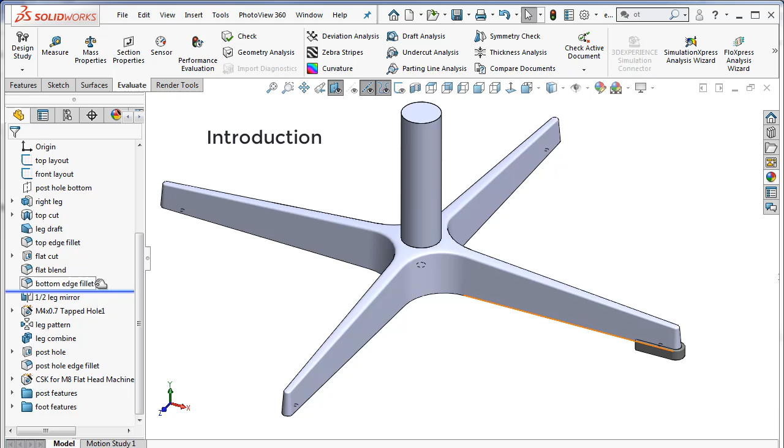Rolling back to just a single leg, the actual chair leg is crowned on the top all the way from the tip of the leg to the center where the post is located. And then there's a sharp edge radius running along the perimeter of the upper edge.

In order to do this properly, you actually have to build this entire surface as a fill surface and then add a fillet at the end. Making that fill surface requires making a lot of temporary surfaces and is very tedious. I've come up with a way to do all this that looks fairly convincing and saves about 10 steps.

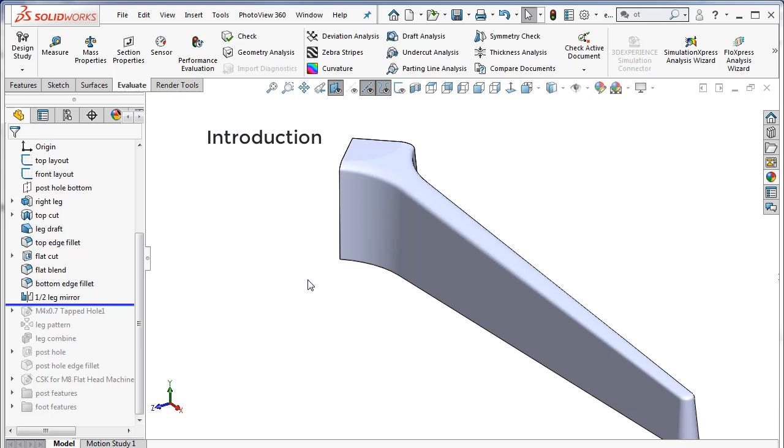The creation of the cross-shaped leg structure itself only takes about 7 steps, and the rest of the steps are adding the foot that go on the end of the legs and the post.

I'm now going to roll this all the way back to the beginning of the feature tree so we can see what our layout sketches look like. On the top view,

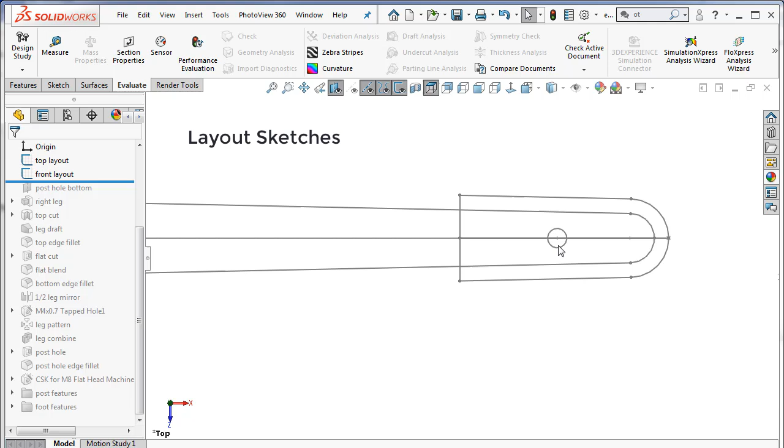we see that each leg is tapered as it goes from the center of the structure out to the ends. And I've also drawn in the top view of the little foot that goes on to the leg, the location of a screw hole that holds the foot onto the leg, for the screw that holds it on rather.

And I've represented just one adjacent leg. In this case, I've fully drawn out the right hand leg and just one line of the forward leg so that I could draw in the radius that blends the two together.

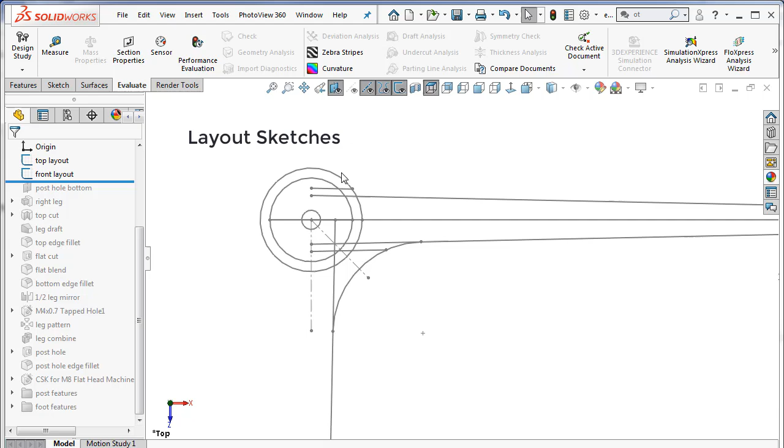I've also drawn this outer circle, which represents a flat area that's just a little bit bigger than the diameter of the post, and then the diameter of the post itself. This line here is a mirror image of this 45-degree construction line.

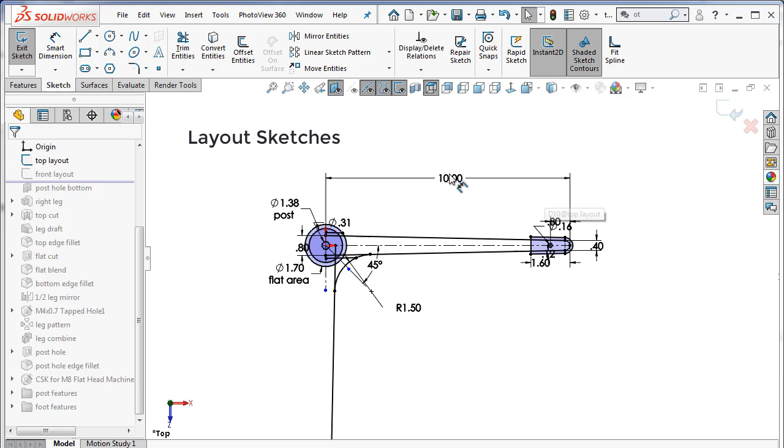As usual with my videos, I've just guessed on a lot of these dimensions, so don't use these dimensions, use whatever you measured on your own chair. I'll zoom in on this a little closer so you can see this all at once, and then move on.

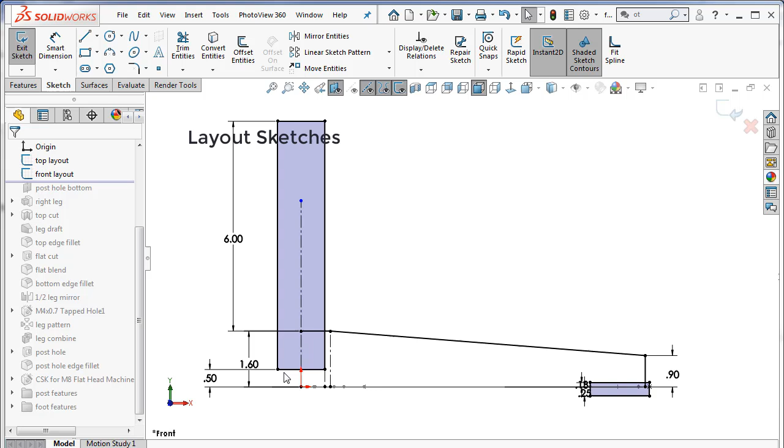The front layout illustrates the leg showing how it tapers downward from the center out to the ends, the front view of one of the feet, and the post itself, which goes partially down into the crossing leg structure. I've also included a plane that's going to be right at the bottom of the post, because what we're going to be doing is having a hole in the crossing structure and then inserting the post into it.

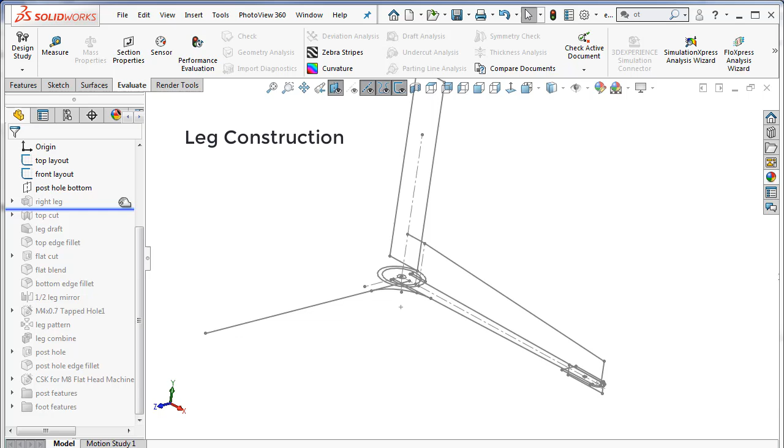So starting with our first actual solid feature, all I'm doing is copying this line here from the top view, the 45-degree line, and then the outer perimeter of one leg, and trimming it all together to get this final result.

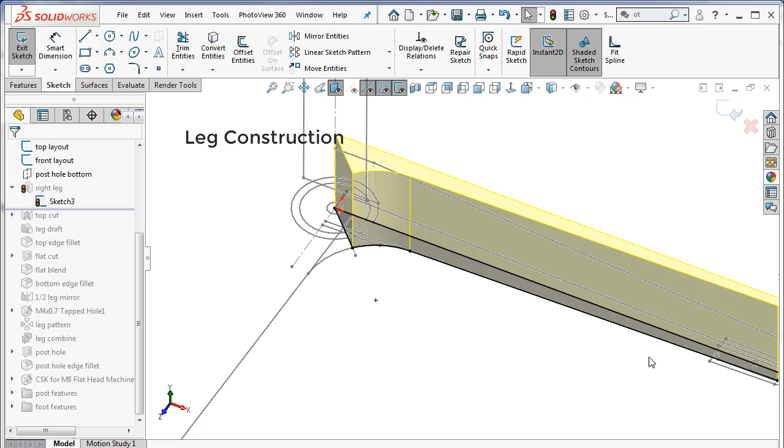So you're going to have a lot of crossing lines that you have to trim to get a clean single perimeter. And then I'm extruding it so that it is intentionally a bit higher than the front view of the leg, because I want to trim this or cut all this material off later, but I want to have some excess, which you'll see the reasons for later on.

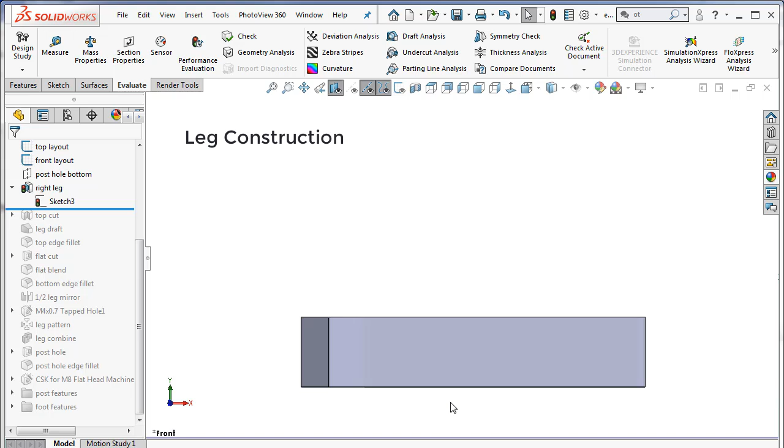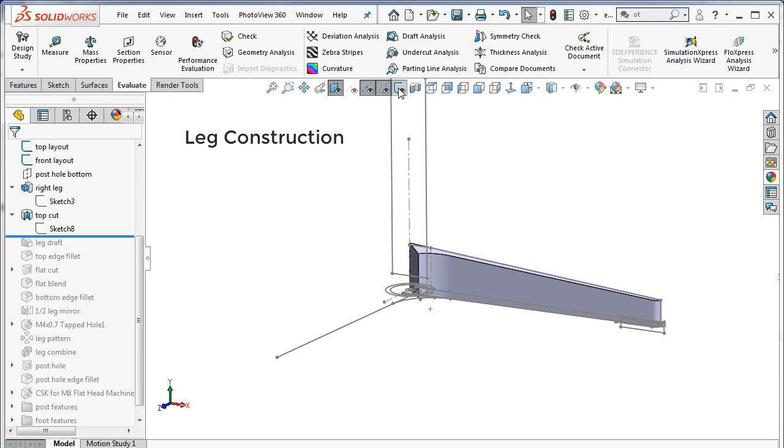Going to the front view again and turning on my sketches, to get this downward slope, I'm doing a revolved cut, which is copying this downward line from the front view layout and doing a revolution around the center of the post. And this gives me a surface which has a slight curve to it, so this is not actually a flat surface.

Now, the actual legs have a lot of draft angle on them, and that has an effect on the styling of the product. So we want to add somewhere between 3 and 5 degrees of draft to these surfaces, 1, 2, 3, and we want to leave these surfaces undrafted.

So what that means is that we could not do this extrusion by adding draft while the extrusion was being made. So when I add the draft, I'm going to use the option of using the neutral plane. My top plane is the neutral plane, and I'm drafting these three faces, 1, 2, and 3.

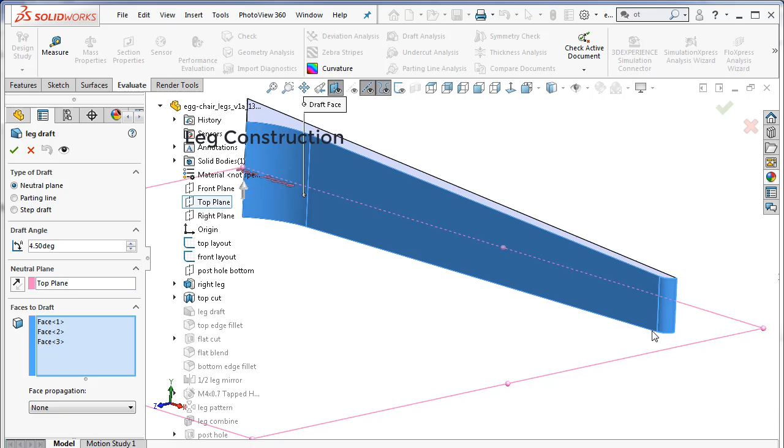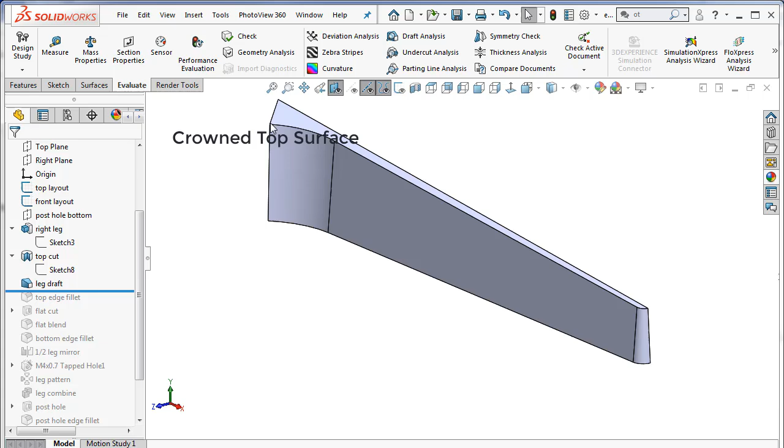If I turn on my tangent lines and roll back for a moment, we can easily see how these surfaces were vertical and now they are drafted, making this upper surface narrower than before. The true nature of this leg is that this top surface is crowned, and that crown follows this perimeter around to this 45-degree angle, and it has to go perfectly normal to this surface so that when we mirror this leg on the 45 degrees, the crown on this surface will match up with the crown of the adjoining surface.

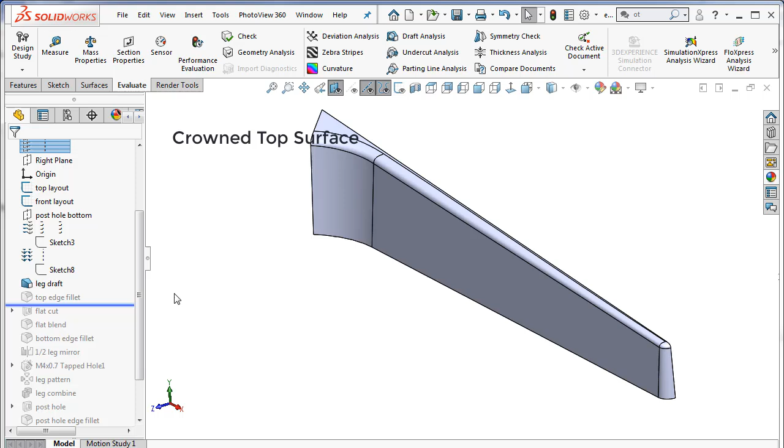That involves doing a lot of temporary surfaces and making a fill surface to make that all come out right. That's a fairly time-consuming process, so we're going to cheat a little bit and get something that's going to look pretty good. What we're going to do is simply add a fillet to that edge, but not a normal fillet. We're going to add a variable radius fillet, and we're not going to use a circular fillet, but an asymmetric fillet.

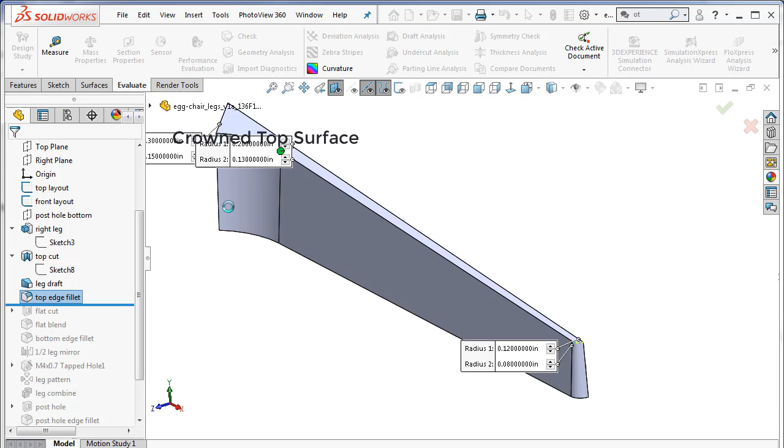So I'll just show that process manually. I'll get out of here and roll back so we don't see the fillet. So choosing the fillet feature, the option I want to go with is the variable fillet, and I want to choose these three edges.

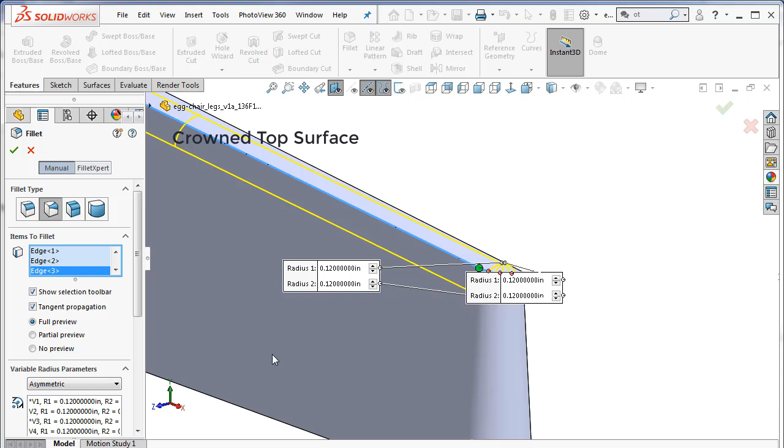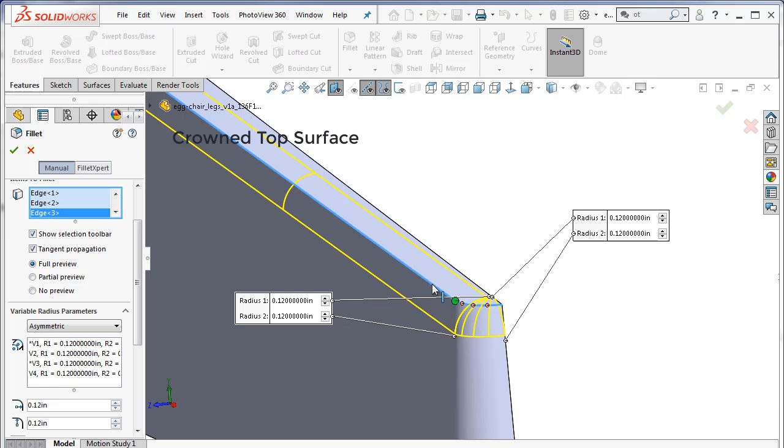And the option I want to use on the variable radius is this asymmetric option, which gives me the ability to make the fillet be greater in one dimension than it is in the other. Right now it's defaulting to 0.12 inches downward and 0.12 inches inward, but we're going to be changing that in order to get this surface to look like it's crowned with a little bit of a fillet where it blends in with the main sidewall of the leg.

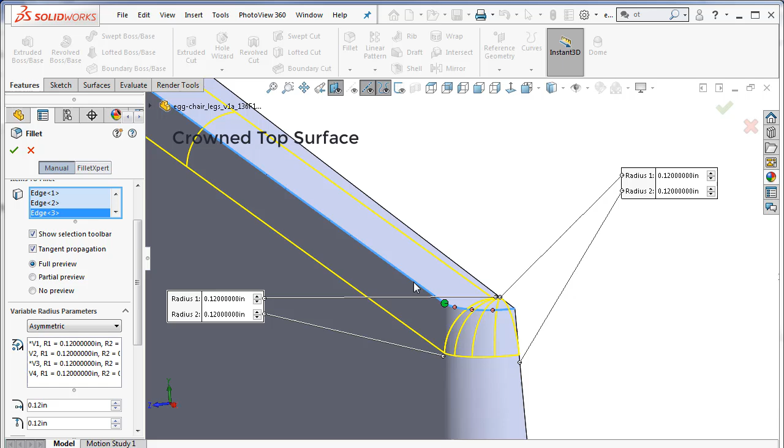Zooming in here first, we'll just work on each piece of the fillet at one time. I think in this area, what I want to do is make the fillet come down about 0.05 to 0.07 inches, and going inward about 0.12, at least on this model, looks about right. When we're all done, I'll point out what I've done and why I did it.

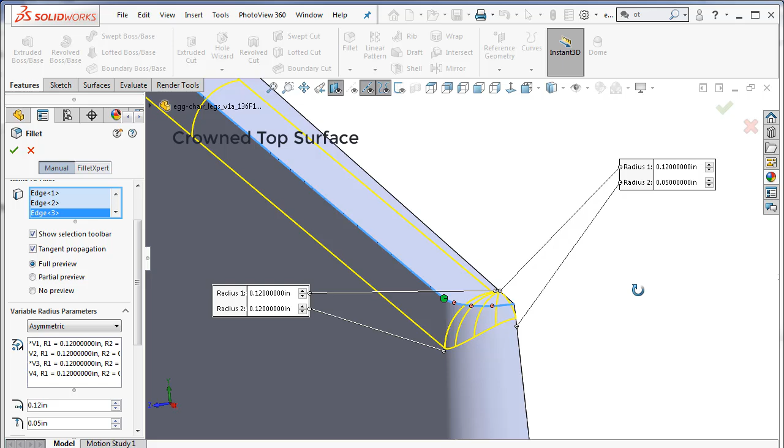So this radius here is going down 0.12, and I want to change this to about 0.05. We'll see how that looks. Okay, that's not too bad. We'll do the same over here.

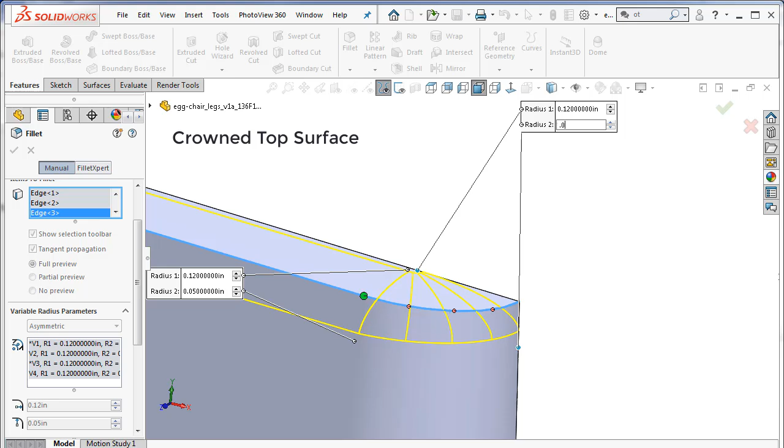So now you can see what it looks like when you have an asymmetric fillet. It looks very elliptical in shape. In fact, I think I'll bring it down a little bit more, maybe 0.07. And do the same on this one.

And the key here is not to go so far inward that we totally obliterate this upper surface of the leg. If we go over too far, what's going to happen is when we mirror the leg to the other side, we're going to get a sharp edge or ridge. So we want to make sure that there's a little bit of a flat left here. And actually this isn't a true flat, as I pointed out before.

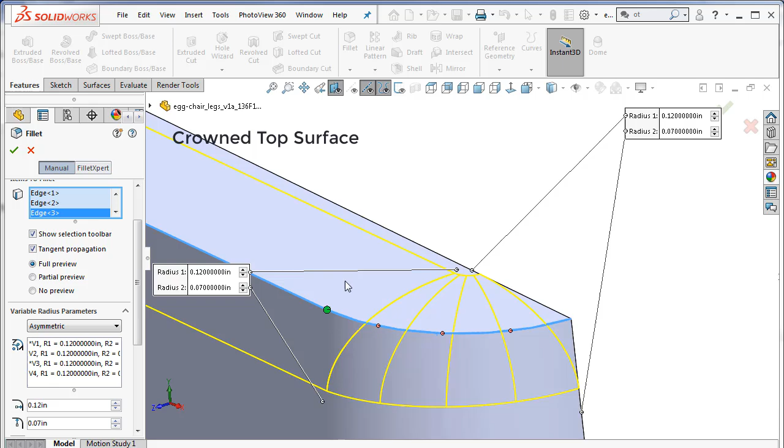Zooming out here, we'll go into this area, and we've got more width to work with, and a lot more height to work with, so we can make the fillet in this area bigger. I think going down about 0.12 is pretty good in this area, but we want to go inward more now, so we can go inward as much as, say, 0.2.

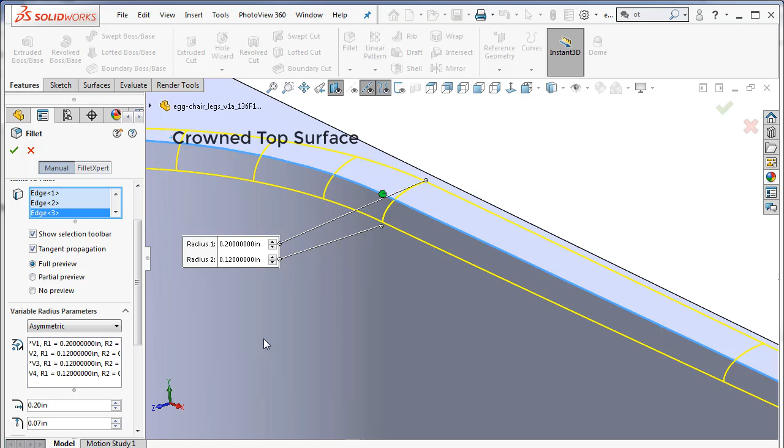You see the width of the flat area here is about the same as you saw at the end of the leg. And then we finally get to this area here, and I think we can go down a little bit more here because the leg is taller in this area. So let's go down 0.15 as an experiment, and we can go in a lot farther. We'll go in about 0.25. So that looks pretty good.

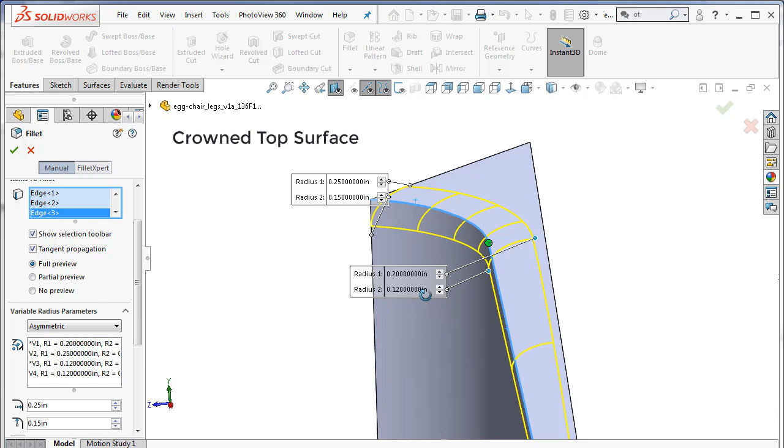So you notice that the shape is this elliptical shape. We have another option we can use. That's under the profile setting. We can go with elliptical, or we can go with curvature continuous.

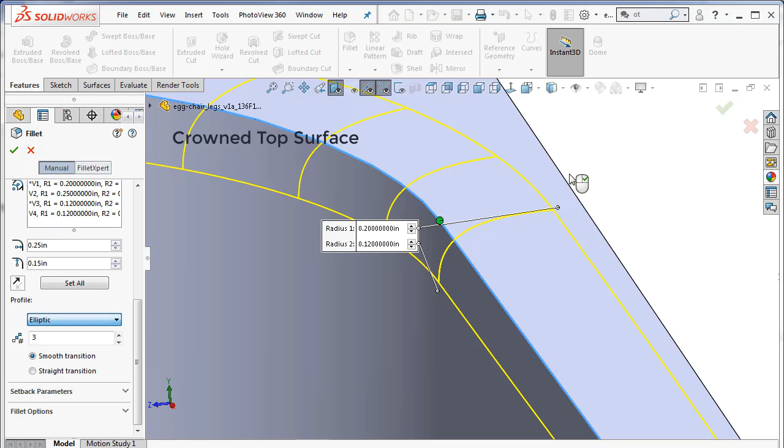When it's curvature continuous, this shape gets more bulgy because this has to flatten out before it joins this surface here and this upper surface here. That might be a little more bulgy than you want, so maybe if we just go back to elliptical, that might be a little bit nicer, especially with regards to how it looks at the end here.

I'll just change the two so you can see the difference. Elliptical, curvature continuous. I think maybe I like elliptical a little better. But that does mean that there will be an abrupt change between the curvature of this fillet and the curvature of the sidewall. So that's the only downside there.

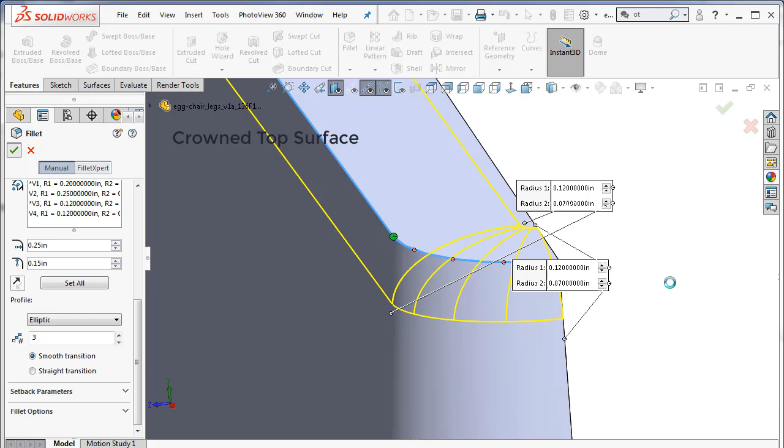We also see that when I use that, I'm getting a dark line here. I have my tangent lines hidden right now, so this means that from here to here is not perfectly tangent. So let's go back to our curvature continuous and see what happens.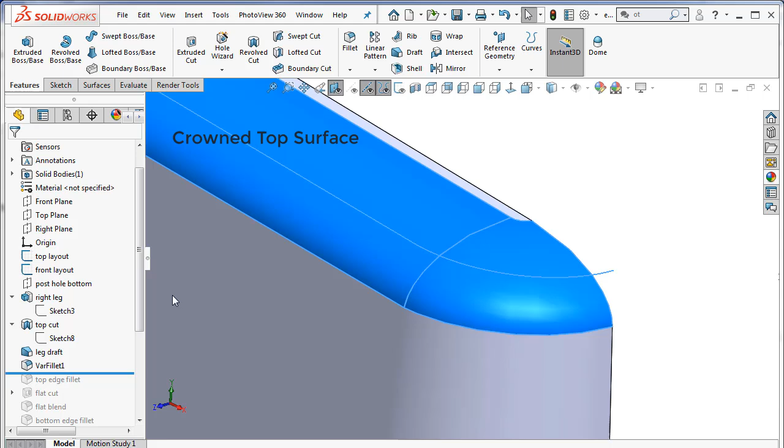So maybe I'm just going to have to live with that option. What I've done here, by using this type of fillet and bringing it as close to the center of the leg as possible, is I sort of faked the appearance of a surface that is crowned with a radius running along the edge, because it's very flat curvature here and much more highly curved here, just like a separate fillet would have been. I think that's a good workaround, which saves us about 10 steps, as I mentioned before.

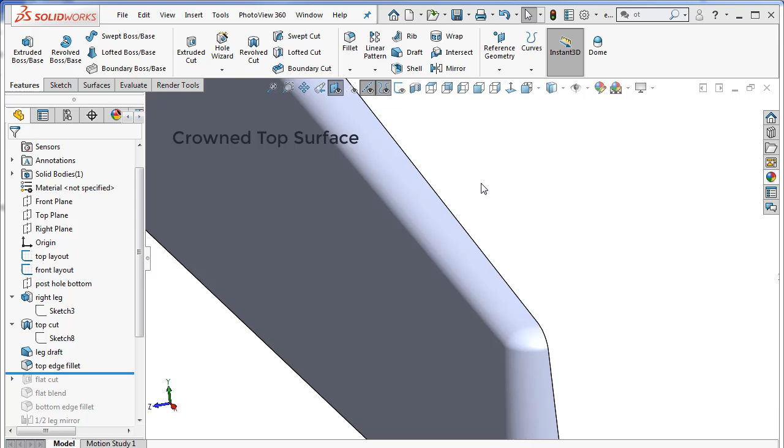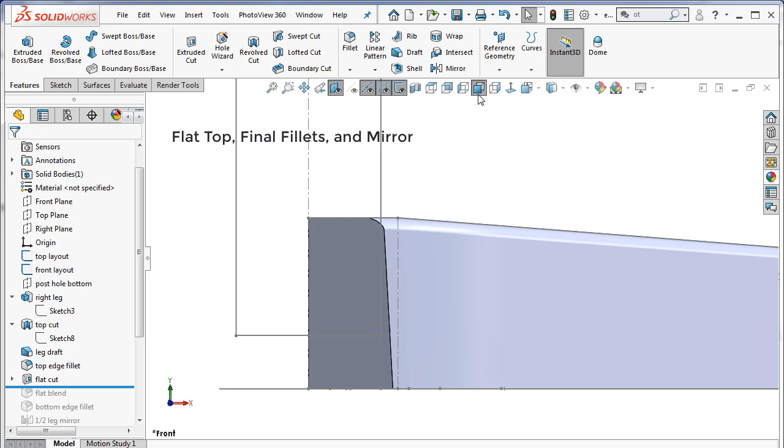Again, don't trust my dimensions. Play around with that asymmetrical fillet until you get it looking right. We'll zoom out here. I mentioned that there's supposed to be a flat area on the top. I purposely waited to put that in last because I wanted to make it easier to get this asymmetric fillet into place. So the flat cut at the top is just copying this straight line from the front view and doing a simple extruded cut. That gives us a surface here which looks somewhat circular. This area diverges from being circular because it's intersecting with this asymmetric fillet that was put in place. I'm then going to put a blending fillet on that edge here.

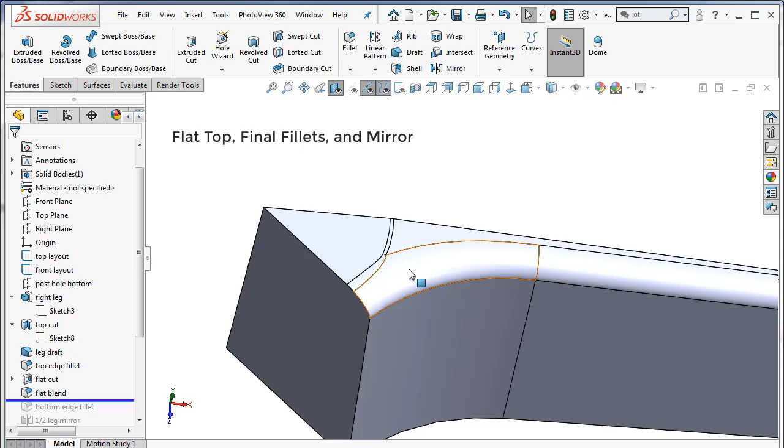I tried putting in a chord width fillet, but for some reason it didn't work. So I just put in a conventional fillet, in this case about 0.3 inches, something that just blends these together nicely.

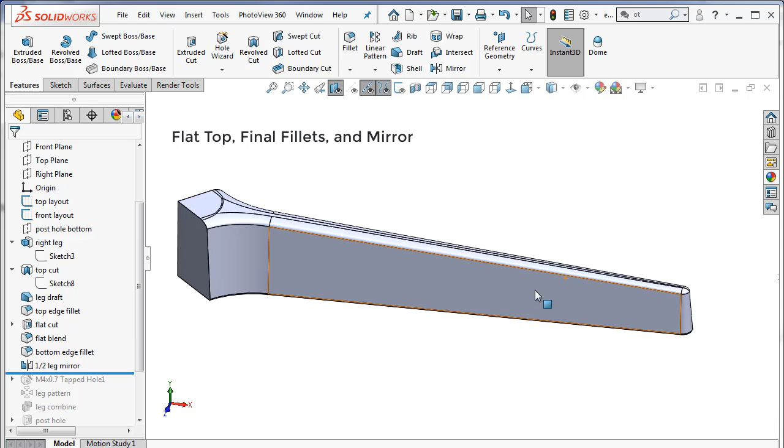That's the basic leg right there. You can see how few steps this actually took. I'm going to put a little fillet on the bottom edge of the leg. We don't want that to be dead sharp. And now we're ready to mirror it on the front plane so that we have one complete leg. And of course we have this 45-degree wedge on the end of it, which is going to let us pattern this around and fit together with the other three legs.

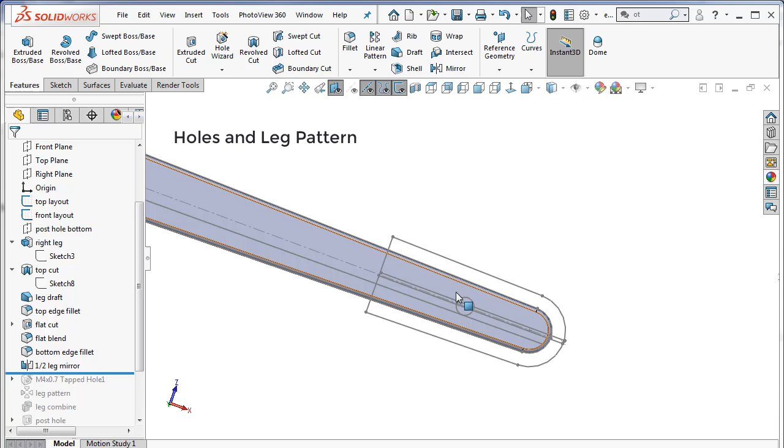Before we do that though, we're going to put a little tapped hole down in the bottom for a screw that's going to hold the foot on. I'm going to demonstrate how to do that. I'm just assuming that we're going to put in about an M4 screw here.

So what we do is use the hole wizard, which we haven't done very much. I'm going to click on the surface first where I want the hole to go, then select hole wizard. And the type of hole I want to use is a straight tap. A tapped hole is a hole that has threads in it.

I want to make sure that the kind of hole I'm using, if I'm going to use a metric screw, says ANSI metric. I can also select ANSI inch if I want, depends on what type of screw you plan on using. I want to use a bottoming tapped hole or a tapped hole. Either of those will work fine.

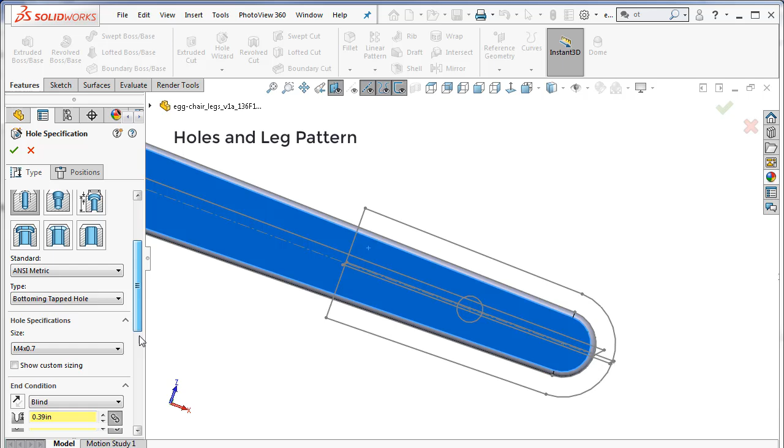And then under hole specifications, I'm going to select M4. I want it to be a blind hole. I don't want it to go all the way in. Solidworks will default to a depth for the hole and the depth for the threads that is typically used for an M4 screw, so you can just go ahead and leave those unchanged. And I want to make sure near side countersink is unchecked.

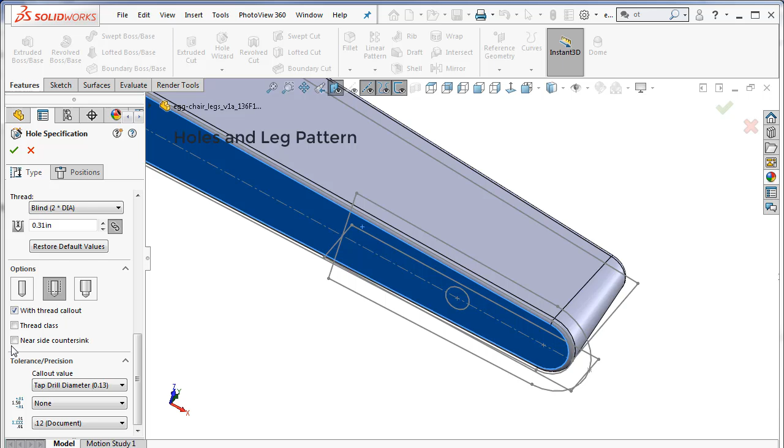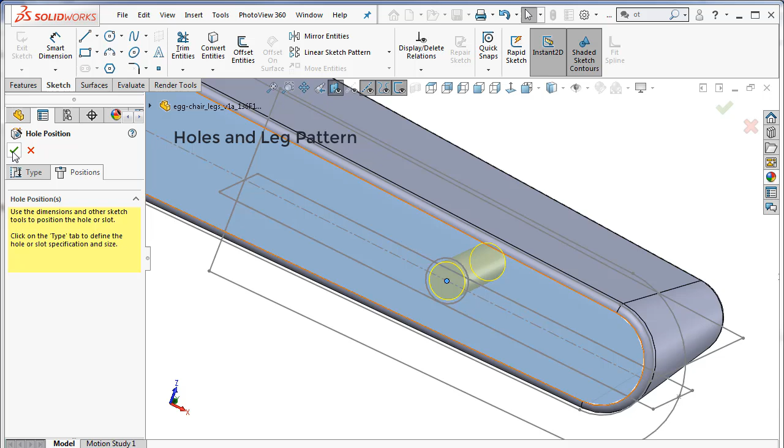And then I go to the Positions tab, and I hover over my surface and click the area, or right where the center of my sketched circle is in my top layout. That will bring the circle right in alignment with the layout point, which is the center of that circle. Click the check mark, and now we've got a hole that has a little point on the end, and it has a little dotted line going around it to indicate that that would be a threaded hole.

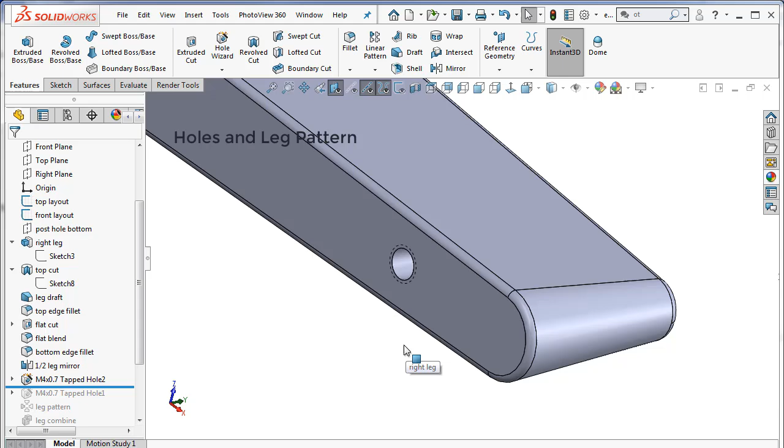So it only takes a few seconds to do this. It took a lot more time to explain it. Now that we have the hole, we have an entire leg that we are ready to pattern.

I'll pattern this using a circular pattern going around this edge, giving me 4 legs. Unfortunately, there's no merge command when you do a circular pattern, so I just have to use the combine command to combine these into a single body.

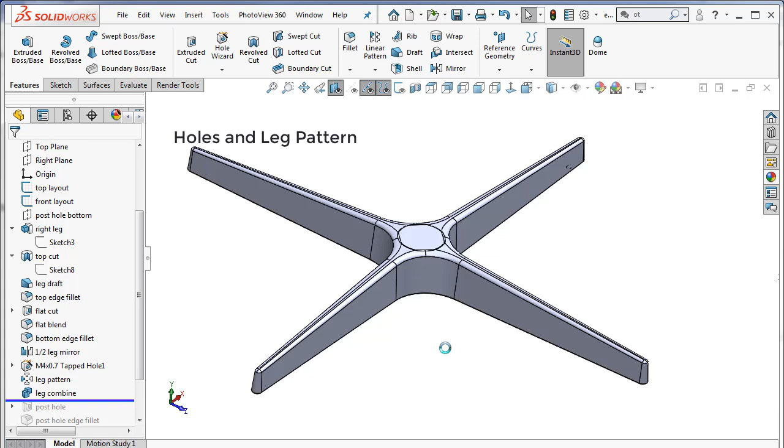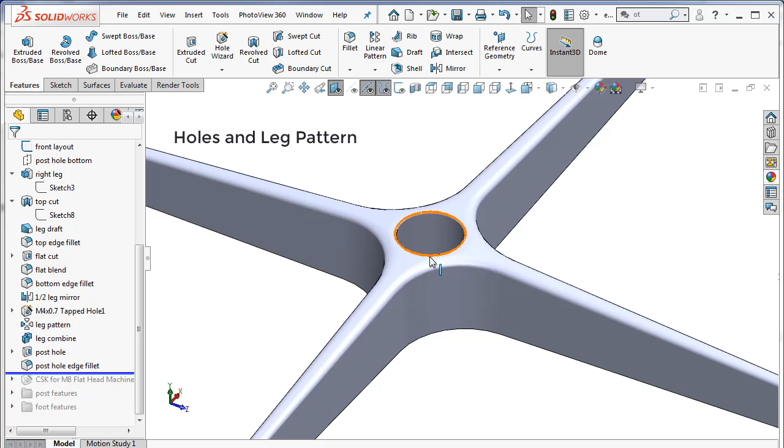I'm going to hide the edges again, then add this post hole in place. I'm going to make that hole sketch on the post hole bottom plane and just copy the circle from the top layout into an extruded cut going upward. That's going to be the hole that the post goes into, and I put a little fillet along the edge of that hole.

And then I wanted to put a hole in the bottom of this so that we could have a screw come up through the bottom that would screw the legs to the post. In this case, I'm assuming a much bigger screw, and in this location it won't be a threaded hole. This would be the hole that the screw would simply pass through but not thread into, and I'm assuming just a big flathead screw like an M8 screw.

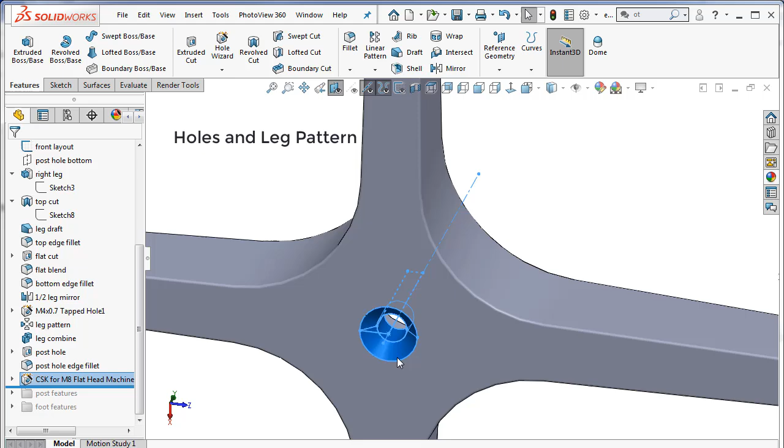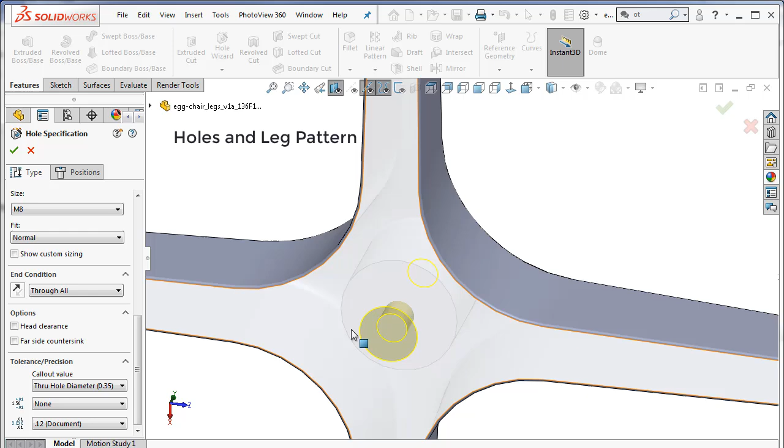So in this case I want to have a screw with a countersink on it, so I can use a flathead. And then what I want to do is be choosing in my hole type metric again, and then I'm going to select countersink. I'm going to select M8. In this case I want the hole to go all the way through, and just like before I'm going to position it so that its location is right on the center of this sketched hole in the top view.

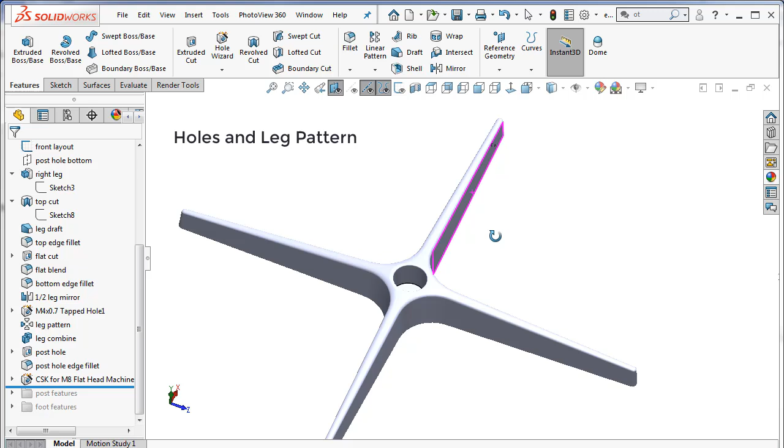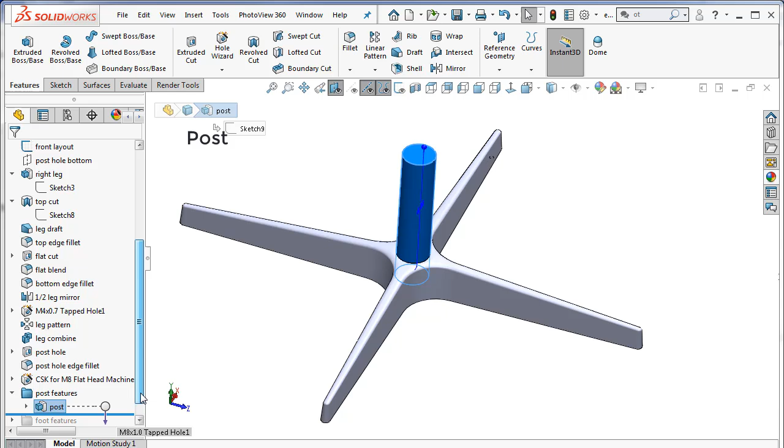Moving on to the post, this is just a circular extrusion starting on the post bottom sketch, post hole bottom plane rather, extruded upward to whatever is the appropriate height. I'm not sure what is correct for this model. And we want to put some sort of a hole in the bottom here, a threaded hole that will match up with this countersunk hole.

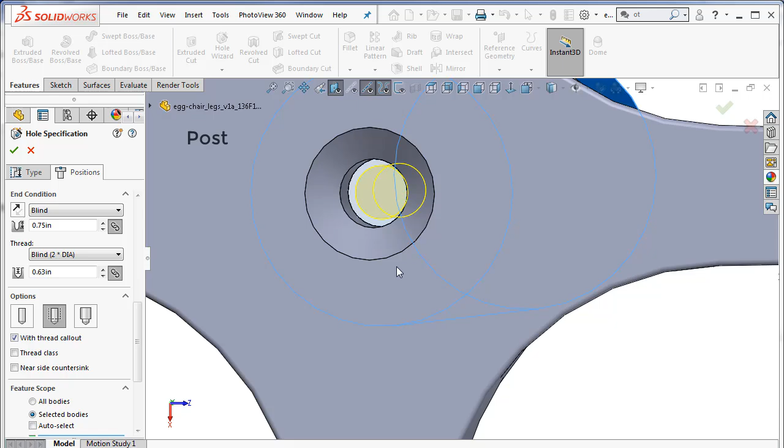This time I selected, once again, a straight tap, M8, bottoming tapped hole, and it defaulted to these 2 dimensions for the hole depth and the thread depth, and then I once again placed it so that it's at the center of the sketched hole. So if I isolate that for a moment, our post is nothing more than a cylinder with a threaded hole in the center.

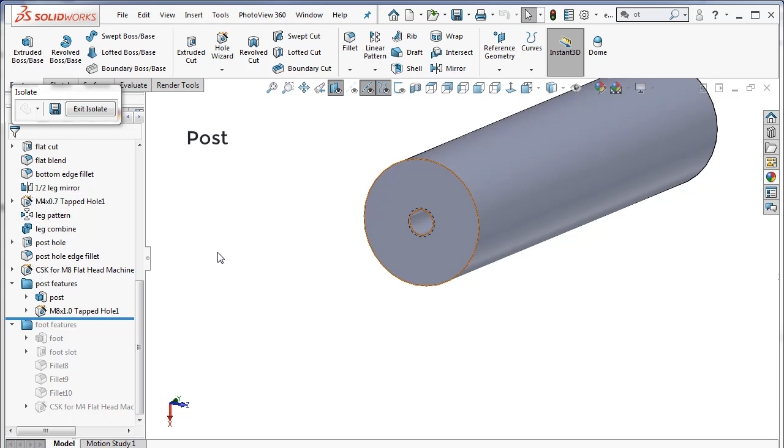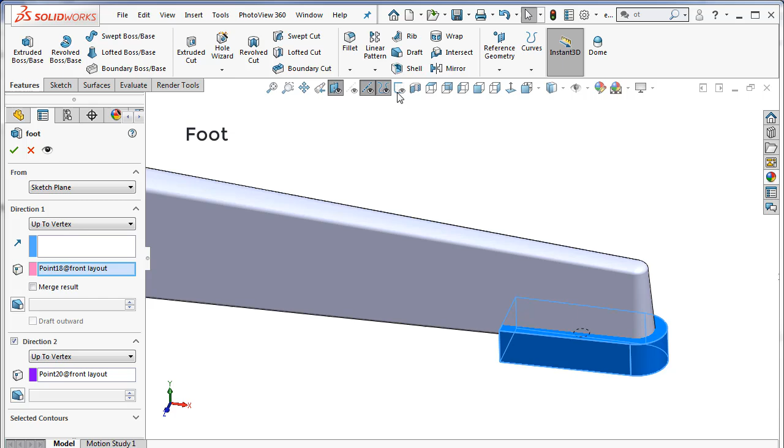So the last piece is the foot. The foot is made by copying the sketch elements from the layout sketch and extruding upward and downward to this vertex here in the front layout and this vertex down here in the front layout.

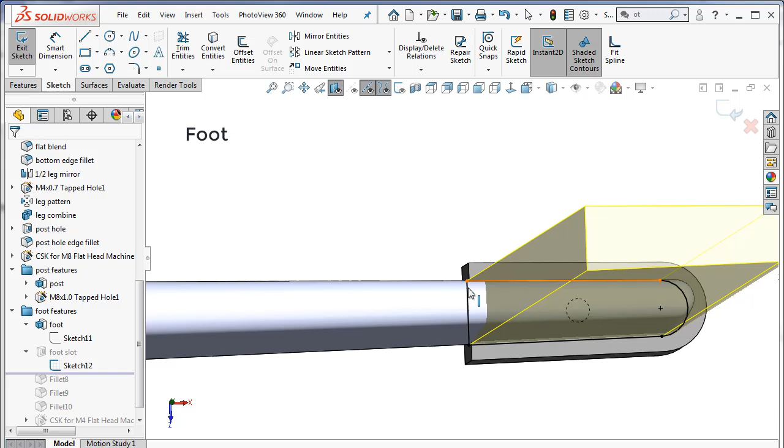Then once again on the top plane, I'm going to do a new sketch, copy the appropriate lines from the layout so that I can have this slot that the leg is going to drop into, do appropriate trimming, and then just do an upward cut through all, but make sure it only goes through the foot and not through the leg.

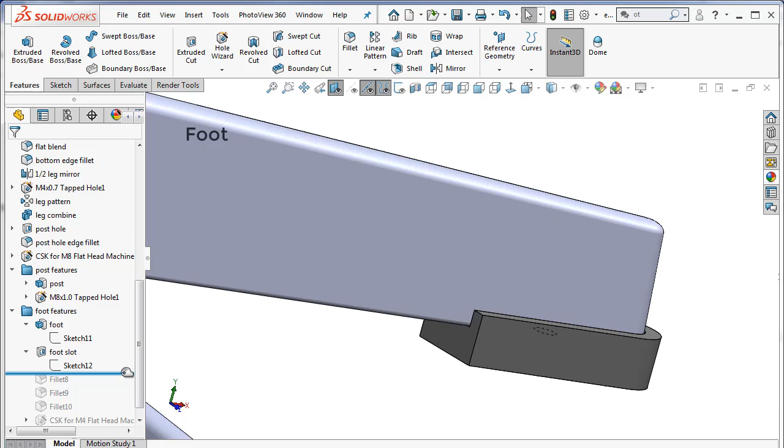So now I'm left with a foot that the leg is neatly dropped into. I add a bunch of fillets to finish it off. And in the bottom here, I'm going to later on have a screw go in. As I mentioned before, we're going to have an M4 screw, or if you're doing this with English screws, maybe that would be like an 8-32 screw or something like that.

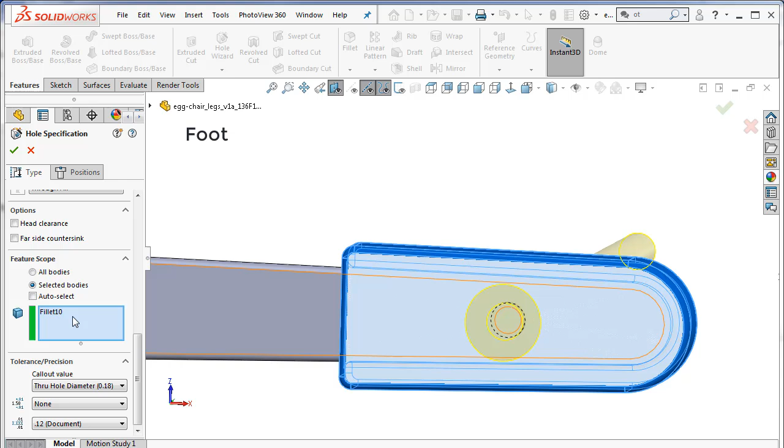And here I'm selecting my countersink hole. The screw type I'm using is going to be a flathead. The size is an M4, and we want it to go through all this part. We need to make sure on the feature scope that only the foot has been selected.

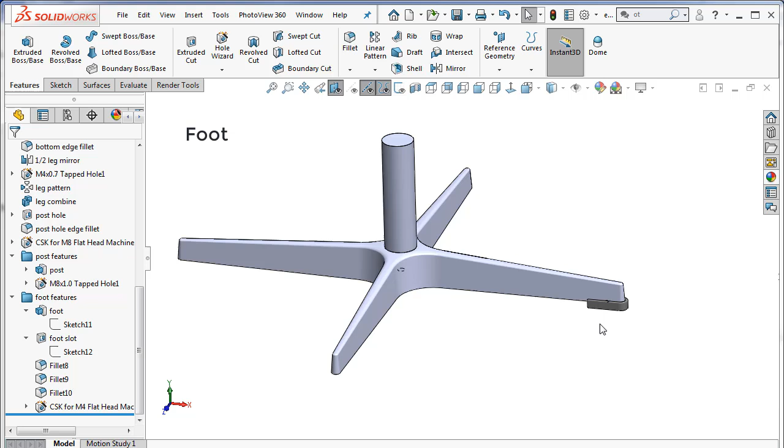We don't need to make the other feet because later on we're just going to save this foot as a separate part. We're going to assemble it in an assembly file, and then to get the feet in the other positions, you will be able to pattern that one part along with any screws or other hardware that we put in.